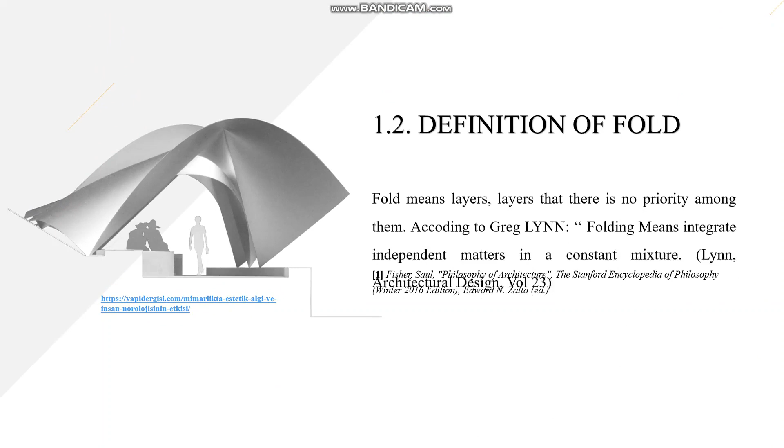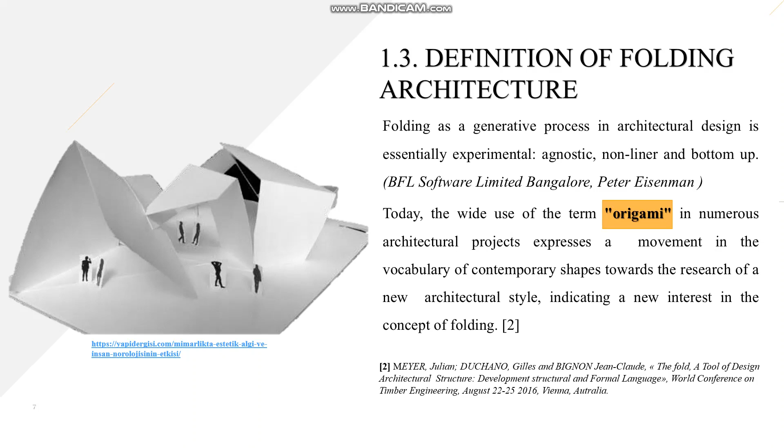Definition of folding means integrated independent matters in a constant mixture. Definition of folding architecture: today, folding architecture is origamic architecture. In numerous architecture projects, it expresses a movement in the vocabulary and contemporary shapes.

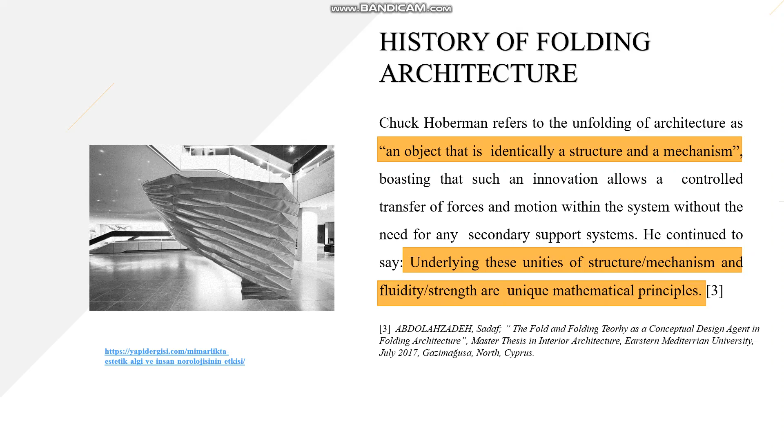History of folding architecture: an object that identically is a structure mechanism, the underlying units of the structure or mechanism, and the fluidity or strength are unique to mathematical principles. In fact, geometry, algorithm, and complex relationships emerge in a repetitive process. Froebel, an educational philosopher, included a collection of geometric toys in his pioneering design of childhood education.

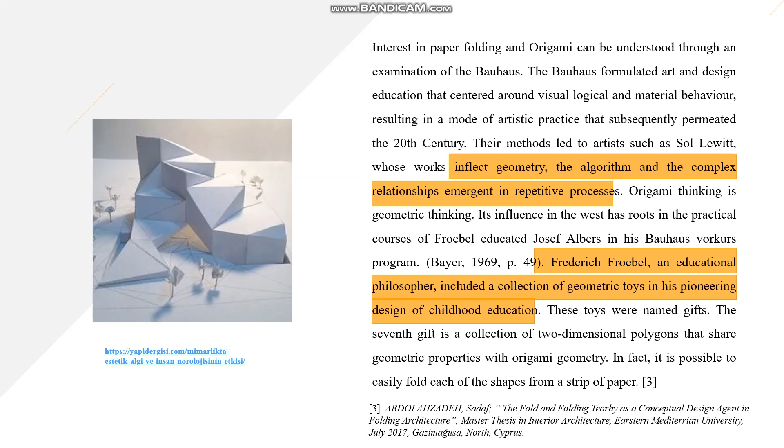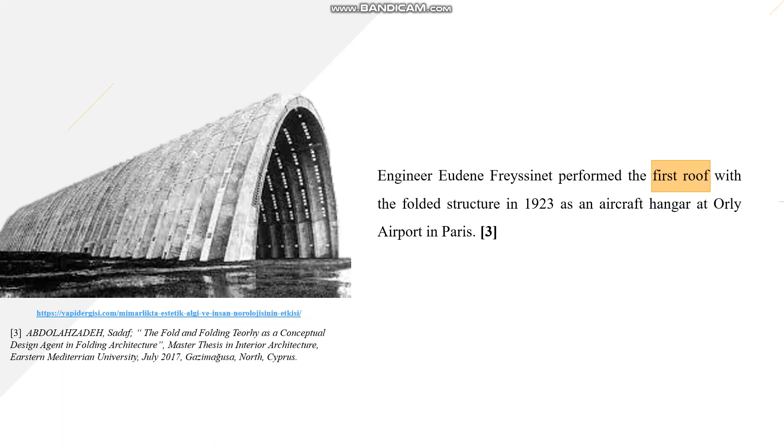First example of folding structure is an aircraft hangar at Orly Airport.

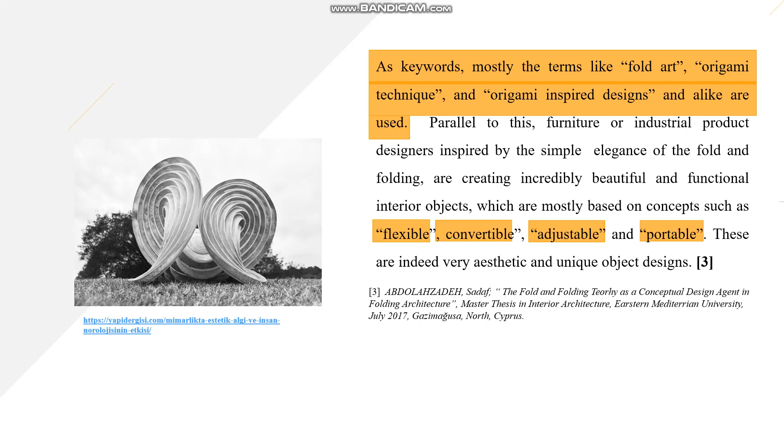As keywords: mostly the terms fold art, origami technique, origami inspired, and alike. They use it flexible, convertible, adjustable, and portable, for origami folding in the ancient Japanese craft of making collapsible forms.

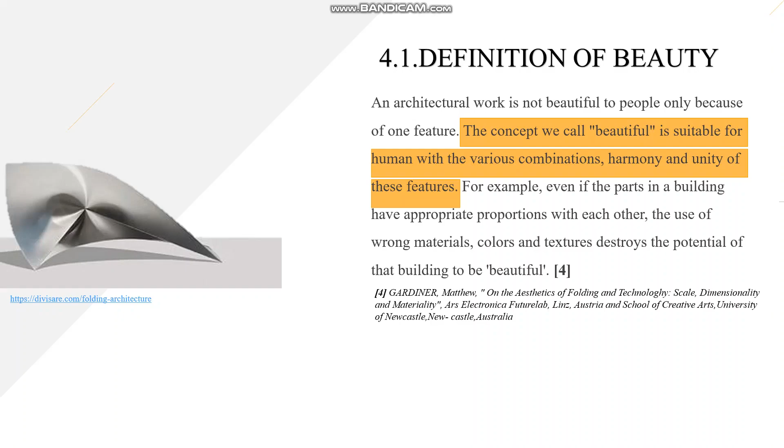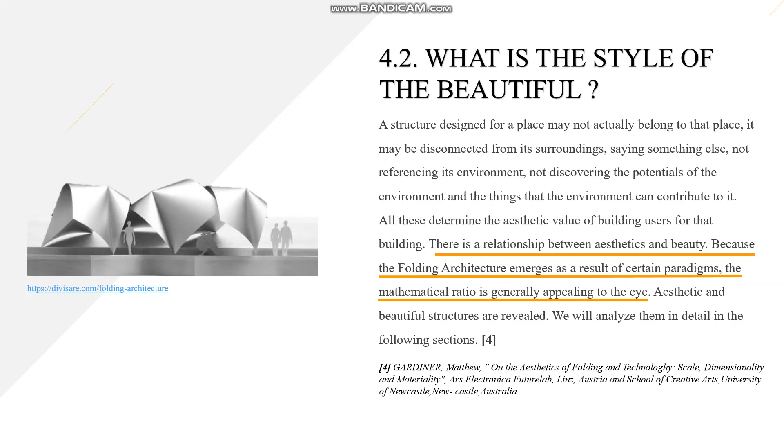Beautiful - definition of beautiful. The concept we call beautiful is suitable for humans with various combinations and harmony of unity of these features. What is the style of beautiful? There is a relationship between aesthetic and beauty because folding architecture emerged as a result of certain paradigms. The mathematical ratio is generally appealing to the eye.

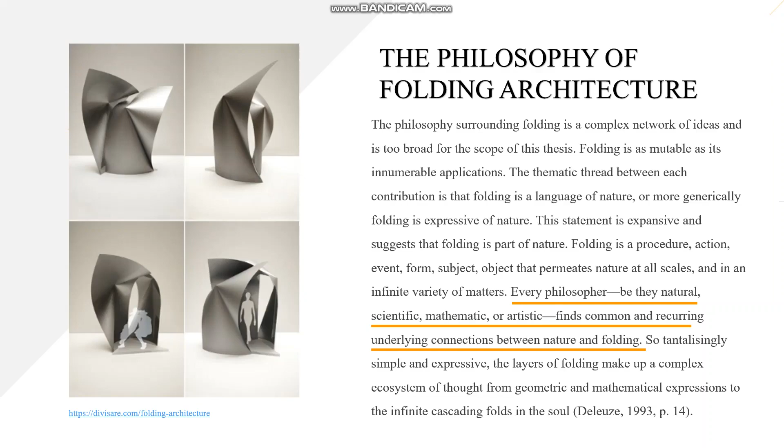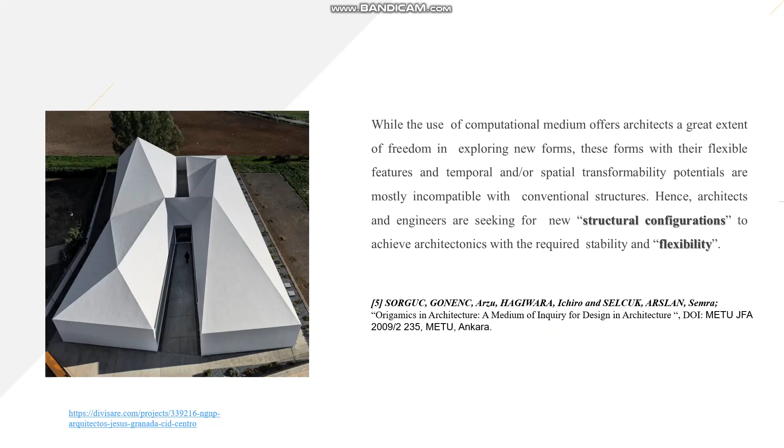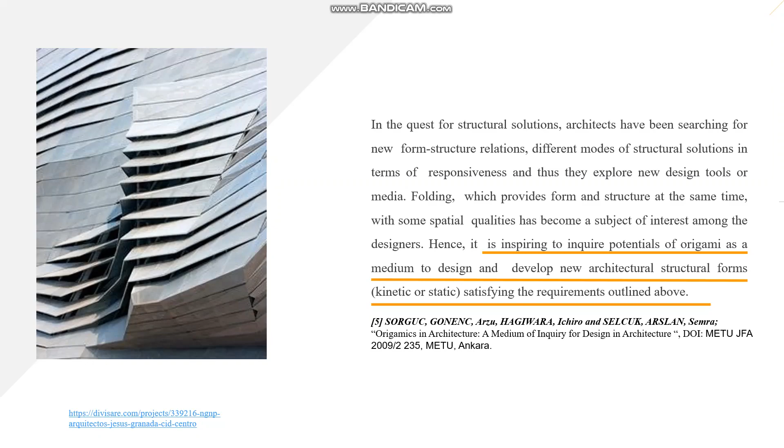Philosophy of folding architecture. Every philosopher, whether natural, scientific, mathematical, or artistic, finds common recurring underlying connections between nature and folding characteristics. Architects and engineers are seeking new structural configurations to achieve architectonics with required stability and flexibility, inspiring to inquire potentials of origami as a medium to design and develop architectural form, kinetic or static.

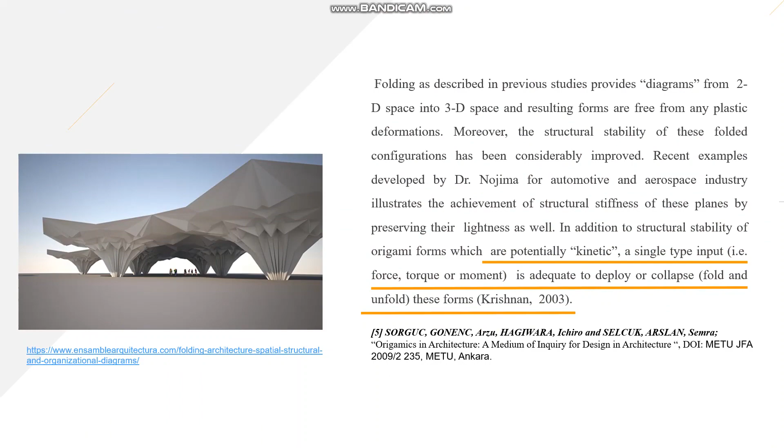Kinetic - a single type of force, torque, and moment. Deploy or collapse, fold and unfold this form.

This part is the literature review. However, despite the need for such innovation in structure and building scale in architecture, it has been encountered very rarely, and new form, sensitivity, and performance quality.

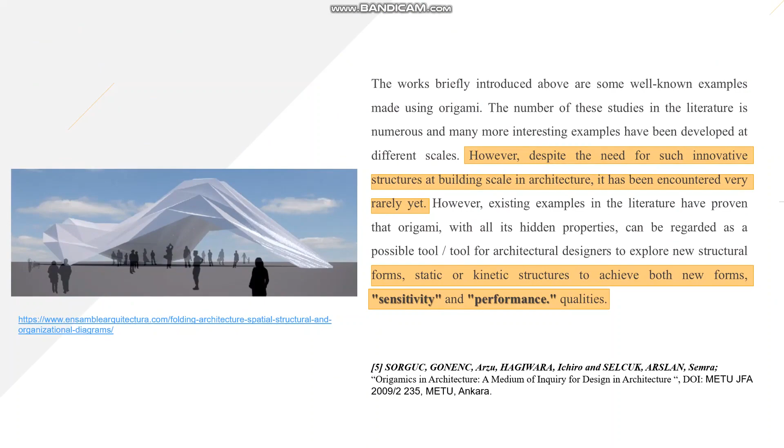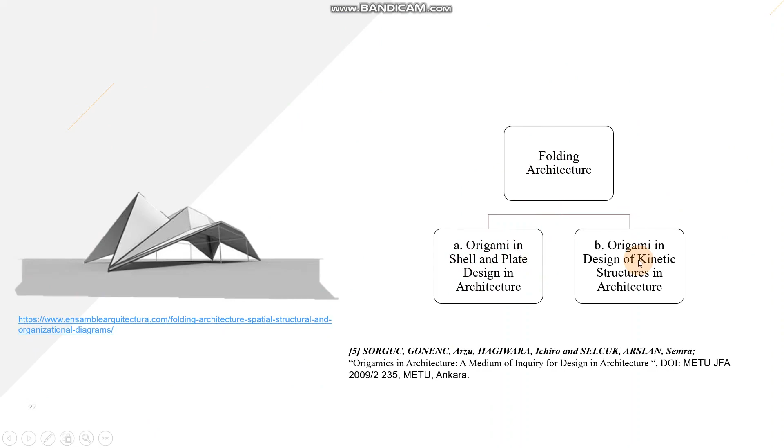Folding architecture is origamic, with two-part separation: origami as shell and plate structure, and origami design as kinetic structure.

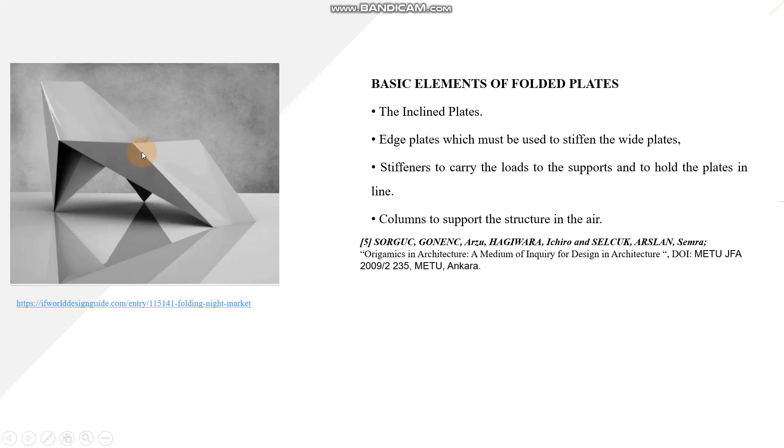Basic element of folding is the inclined plate. Edge plates which must be used to stiffen the wide plates. Stiffeners carry loads to supports hold the plate in line. Columns support the structure in the air.

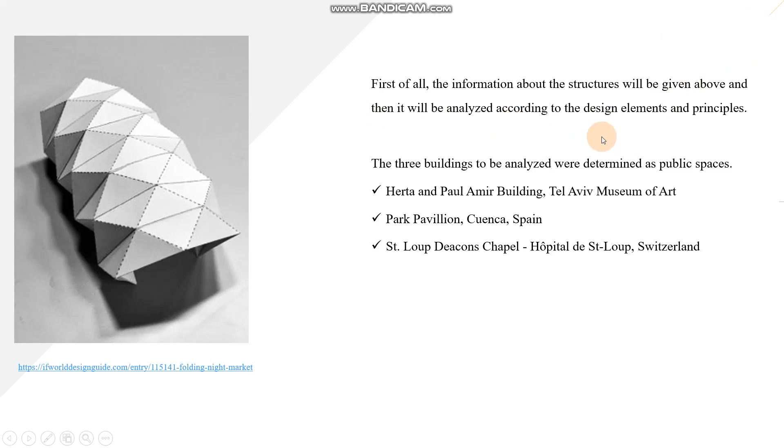Case studies: first, information about the structure will be given, then it is analyzed according to design elements and principles. Design elements and design principles connect with each other, and the working is the aesthetic principle.

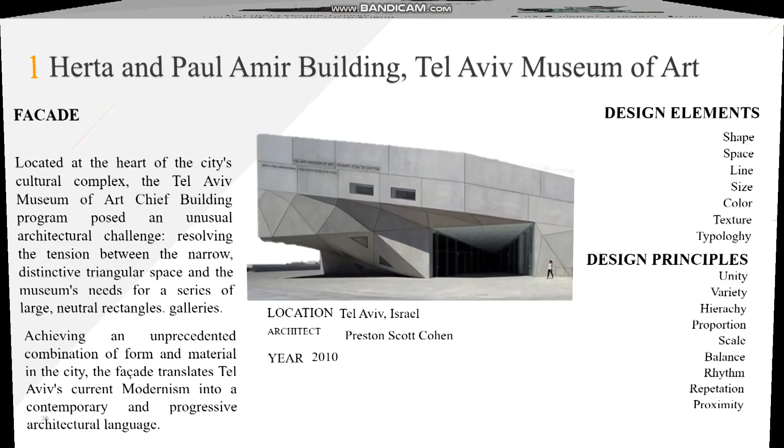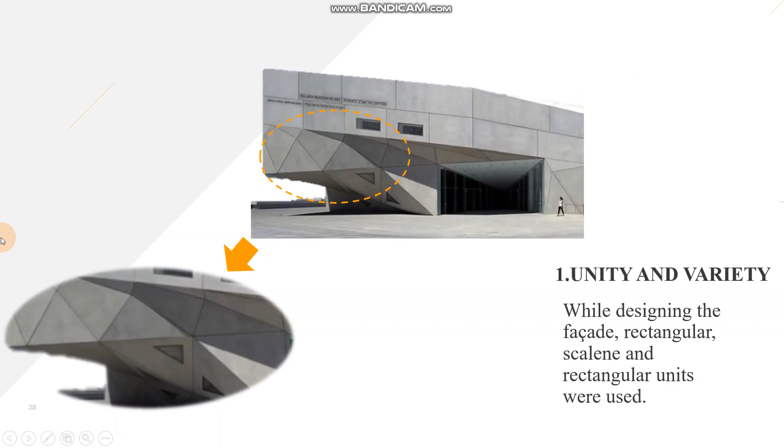Analysis of famous projects, three parts. Firstly, Herta and Paul Amir Building - design principle: unity and variety. While designing the facade, rectangular, scalene and rectangular units were used. Hierarchy: looking at the facade design, elements are regularly designed with different balance.

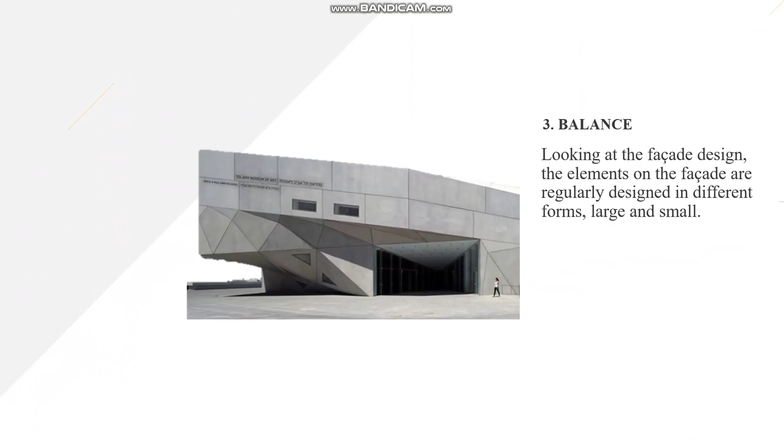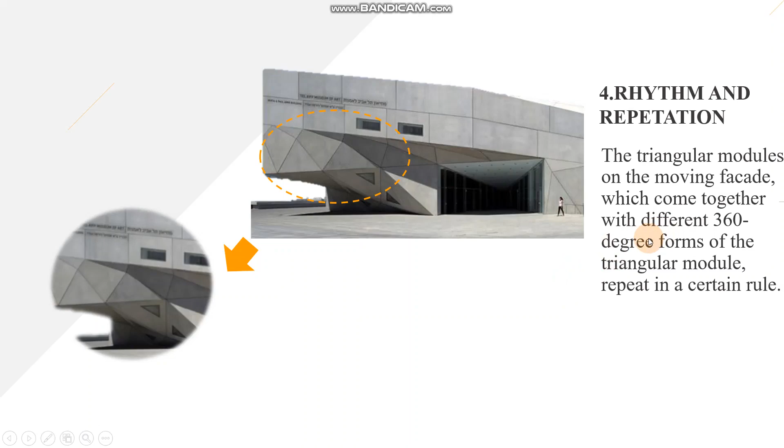Looking at the facade design, the elements on the facade are regularly designed in different forms, large and small. Rhythm and repetition: triangular modules on the moving facade come together with different 360-degree forms of triangular modules.

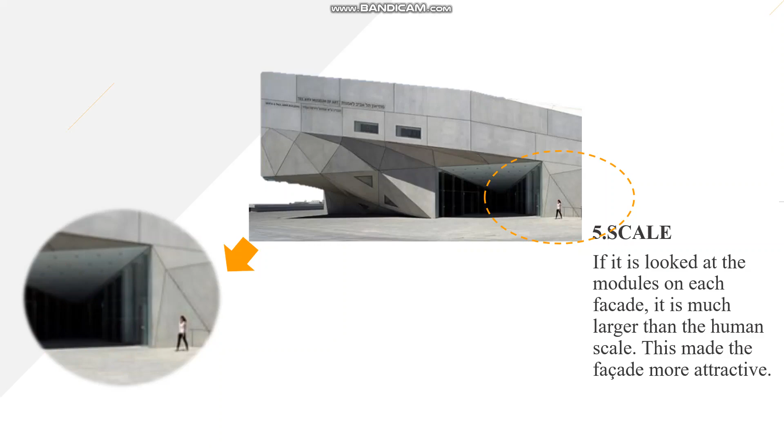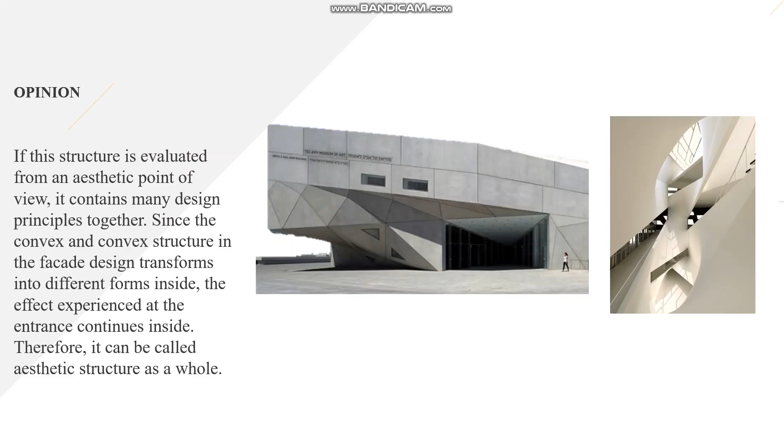Scale: if you look at the modules of the facade, it is much larger than human scale. This makes the facade more attractive. In my opinion, if this structure is evaluated from an aesthetic point, many design principles come together, therefore it can be called aesthetic.

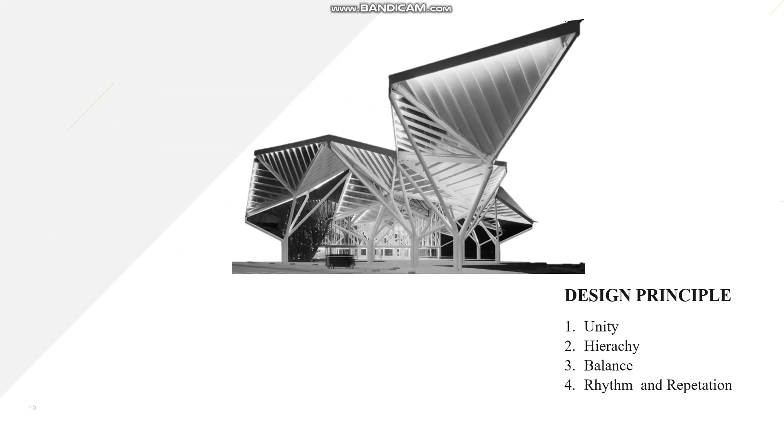Second part is the park pavilion in Spain. Design principle, first unity: a pavilion consists of a combination of triangles, open and semi-open or closed triangular units.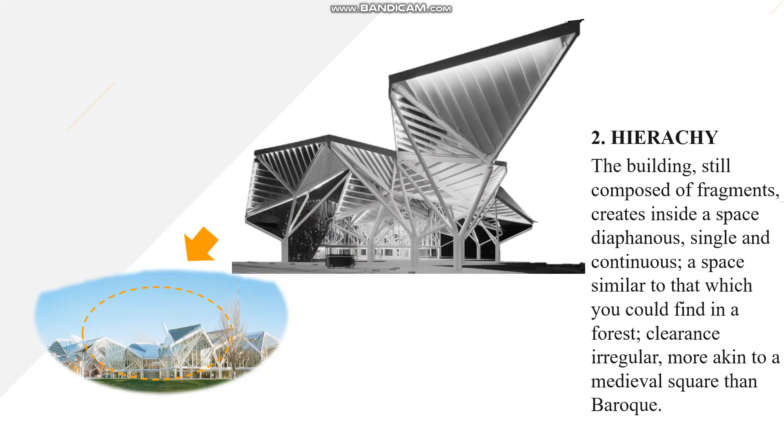Hierarchy: the building style is the pragmatic creation of balance, and the development of the final geometric shape of the module was based on the search for balance between the repetition of the unit and the composition.

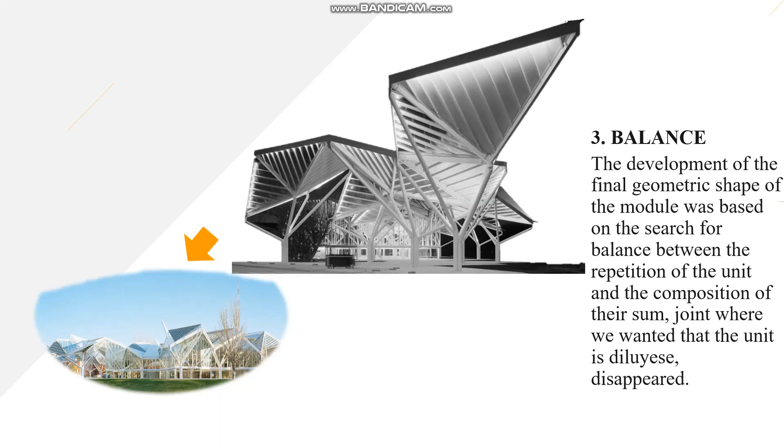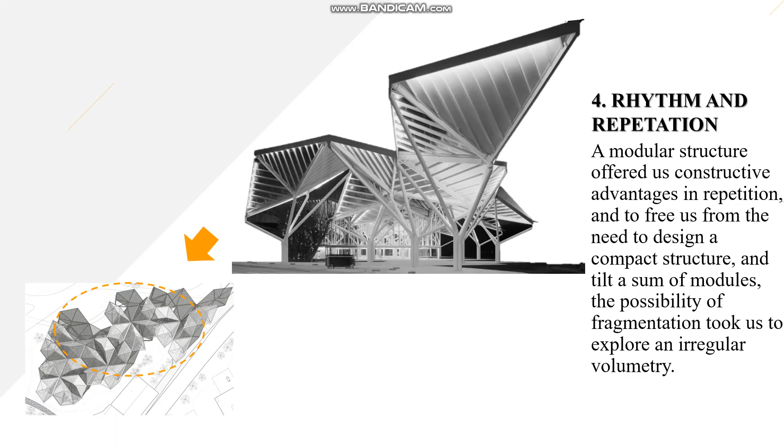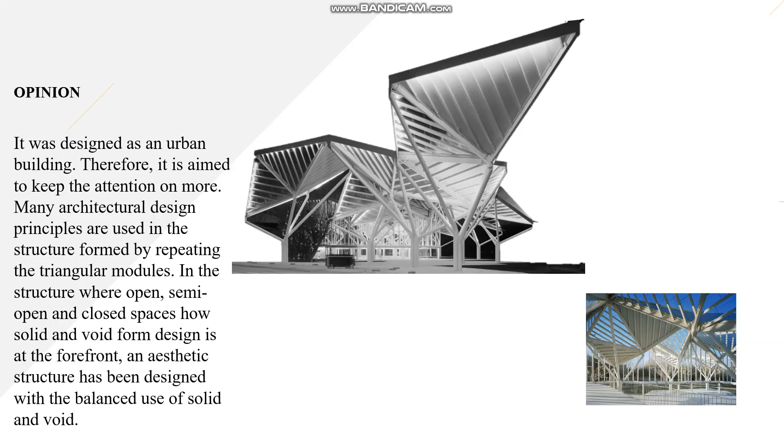In my opinion, since it was designing an urban building, it's aimed to keep attention on it more. Many architectural design principles and parts are used.

Third case study is the chapel. Design principle: the rectangular modules in the building form a unity. Scale: since the modules inside and outside are the same.

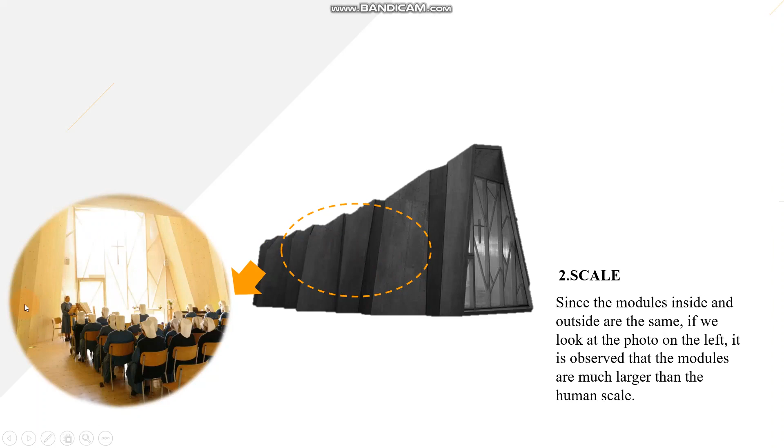If you look at the photo on the left, it is observed that the modules are much larger than human scale for balance. The structure is formed by the bending of the modules, with the folding comparison form given from outside.

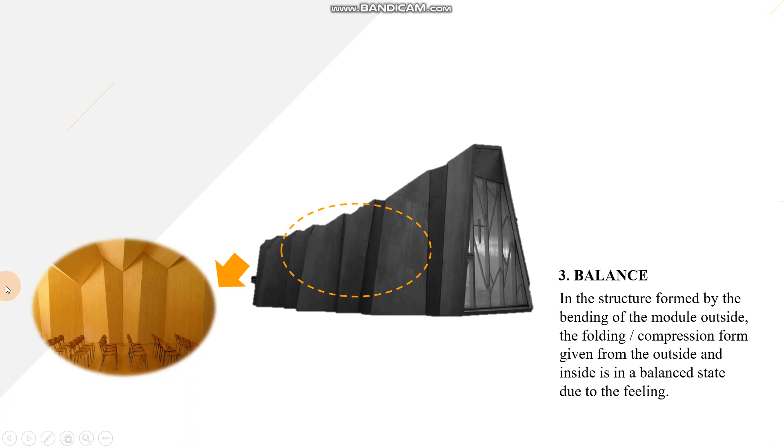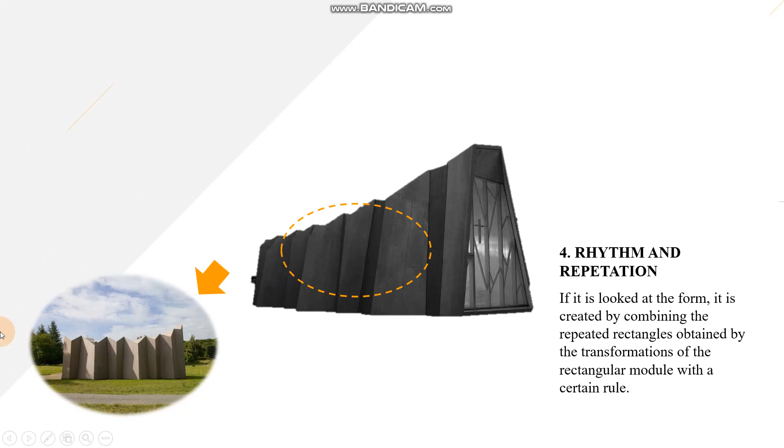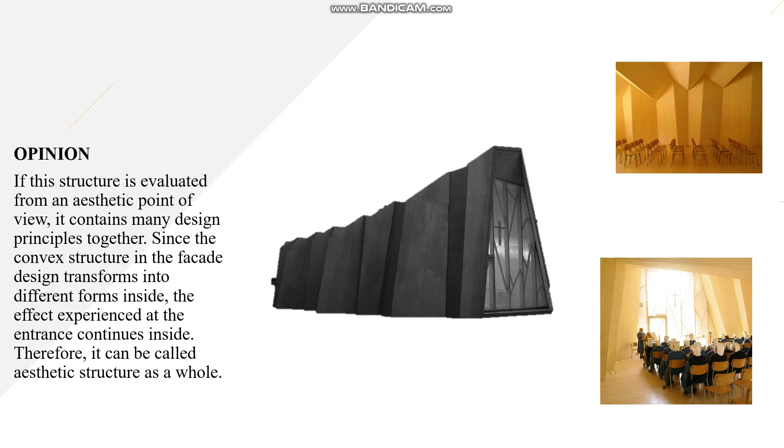Rhythm and repetition: if you look at the form, it's created by the combination of repeated rectangles obtained by transformation of the rectangular modules. In my opinion, if this structure is evaluated from an aesthetic point of view, it contains many principles together, therefore it can be called an aesthetic structure as a whole.

Monad is the fold. The fold is not separated into parts but divided infinitely into smaller folds. Monad is an atom. Deleuze's philosophy was based on modernism - folding is a rejection of verticality and hierarchy, therefore contemplation horizontally.

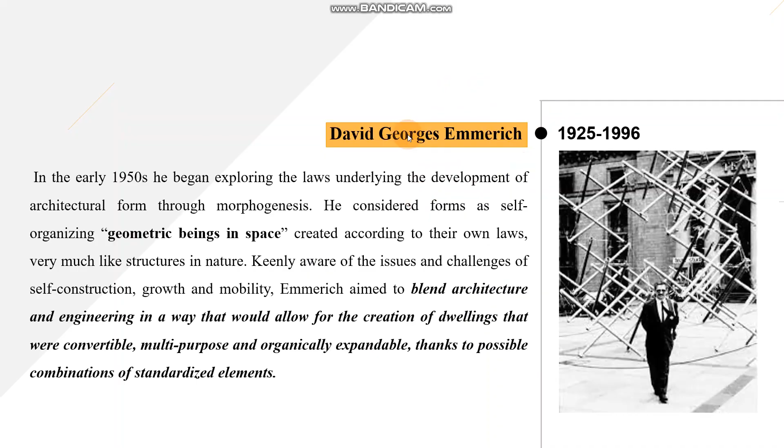And David Emmerich and Peter Eisenman. That's all, thank you for your attention.